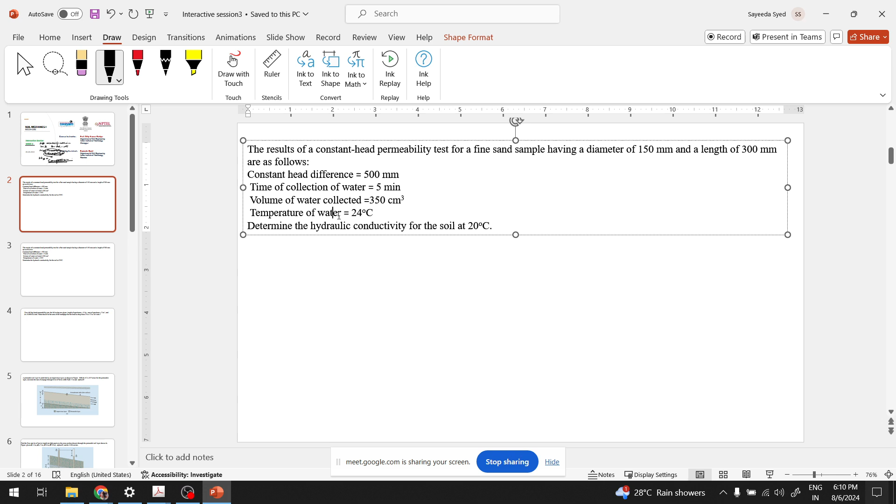First, we can do one thing. We can discuss what is it that we studied in permeability. So there are two concepts, permeability and seepage.

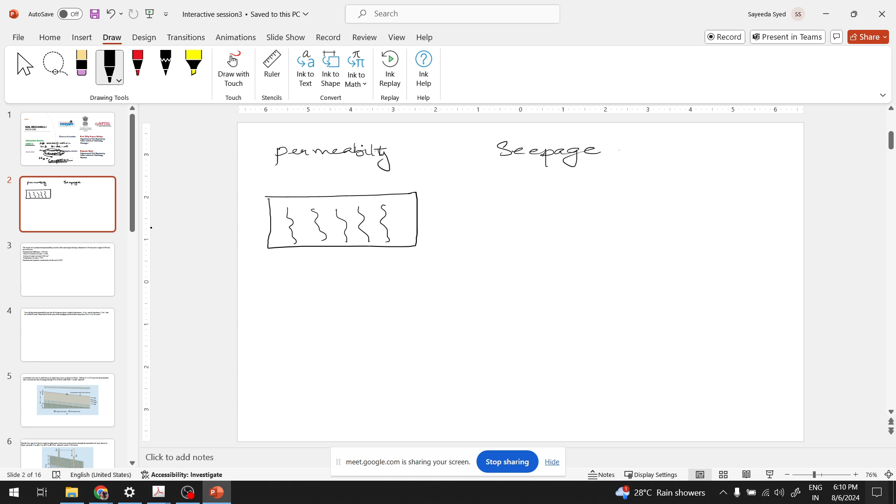So permeability just means that if you have a soil body, based on the pore structure of this soil body, what will be the rate of flow of water through this soil body. Coarse grained soils have higher diameter pores, so they are freely draining. The water does not encounter resistance in case of coarse grained soils, gravels, and sands.

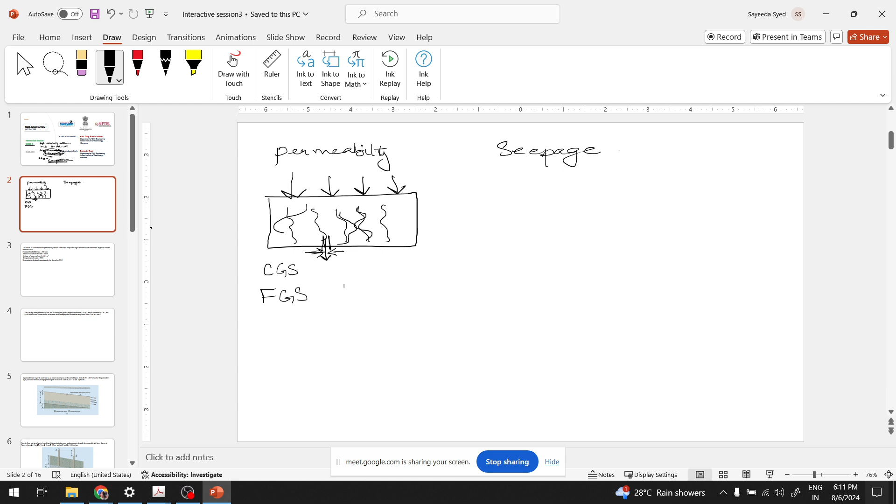However, in fine grained soils, the pores are so small, the diameter is so low that you encounter capillary forces. When your diameter is too low, the downward gravity force will be almost equal to, will be countered by the upward capillary force. See, if I take a thick tube and I have a column of water that wants to pass here, there is a force of adhesion, this surface tension, a force that will resist around this tube, and a force that is going downwards.

The force going downwards is the weight of this column. Now, when the diameter is too large, this weight is much, much greater than this resisting force. It's not even comparable. That is why we say that we have encountered negligible friction, negligible resistance to flow.

It's not negligible, there is resistance to flow based on the diameter, but the difference between coarse grained and fine grained soil is that when the diameter is low, the weight of this column reduces such that this is now comparable to these forces. That is why here we encounter more resistance.

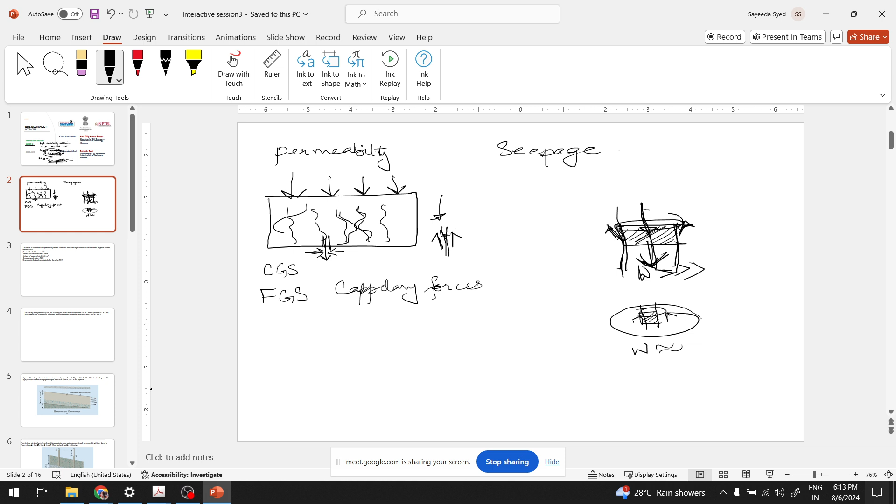So when we talk about soils, we firstly classify coarse grained and fine grained. Then, because they have totally different behavior, we talk about how fine grained soils behave with water and how coarse grained soils behave with water.

So in permeability, you have studied Darcy's law, which states that if you have a column of soil, this is basically kind of an energy conservation. We know that just like water flows from a higher level to a lower level, there is high potential here, low potential here, water will flow here.

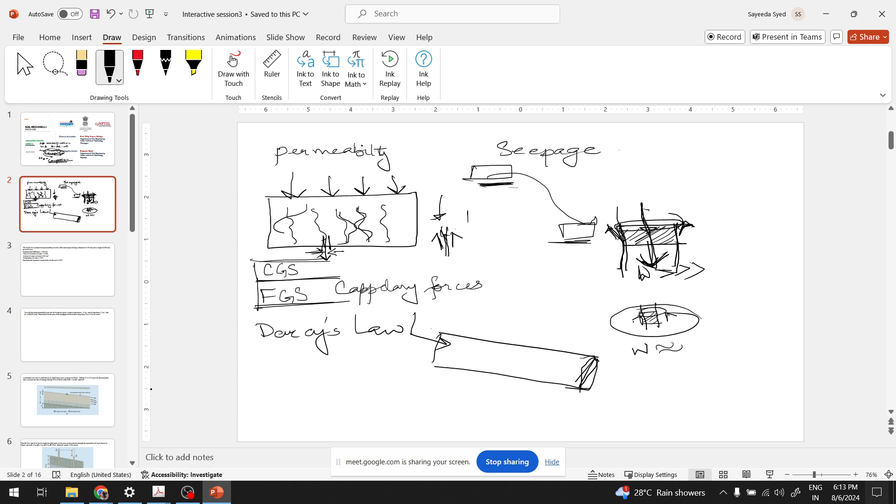Heat will flow from higher temperature to lower temperature, high potential to low potential. Same is the case with soil. Here, you have a gradient. So, high potential here, low potential here. If you have high head here, low head here, the water will flow in this direction.

So Darcy's law states that V is directly proportional to I, which means that the velocity with which this water will move is directly proportional to the hydraulic gradient. Greater the gradient, greater will be the flow of water, and this is a kind of fundamental property of soil.

Based on its structure and pore space, it will have a particular resistance to the flow that contributes to this proportionality constant, which is V equals K I. Now you have a hydraulic conductivity and you have an intrinsic permeability.

Intrinsic permeability is only due to the pore structure, while the hydraulic conductivity also accounts for the viscosity of the fluid flowing, the temperature at which the fluid is flowing, because these inherently affect the properties of the fluid which is flowing. For example, if instead of water, oil is flowing here, it will not move with the same speed as water. But when we talk only about soil structure, which is intrinsic permeability, then we say that it is a fundamental property because it's based only on the pore structure.

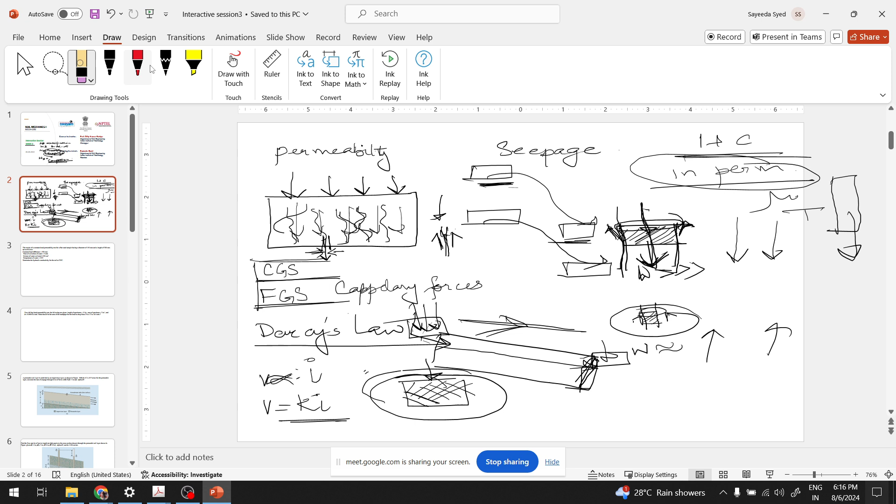So in permeability, we studied what permeability is. Then we studied how we calculate permeability. So there are some tests in lab.

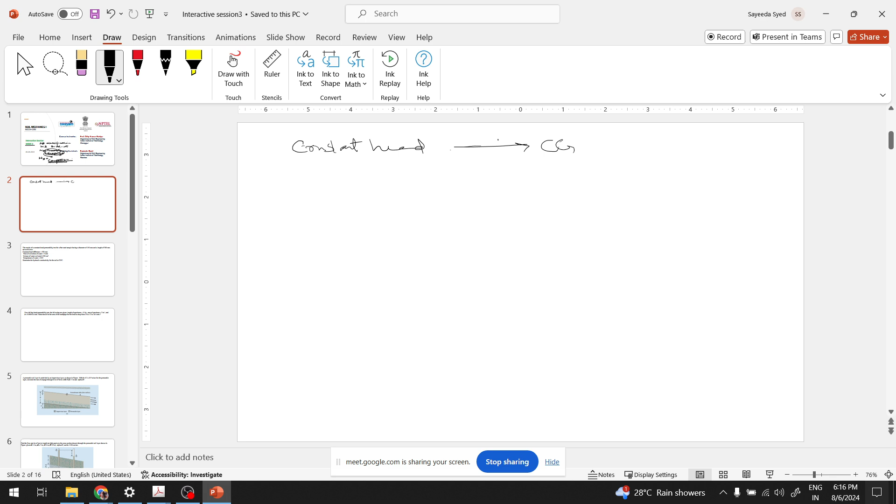Now, because coarse grain soils are freely draining, fine grain soils are not so freely draining. So we have different tests for different soils. We have a constant head permeability test in lab for coarse grain soils, and a falling head permeability test for fine grain soils.

I'm sure you studied this, so I will not go in detail. Then you have some field tests, how we conduct permeability in a field. Why is it necessary to conduct permeability in a field?

Just as I said, you are talking about pore structure. Now, if you take a sample from the ground, this is a disturbed sample, you collect only this part and it gets disturbed, somewhat squished or expanded. So will this reflect the actual permeability in the field? Also, because the soil is heterogeneous, the permeability reflected here will not be equal to the permeability elsewhere. That is why we conduct field tests in which we calculate the permeability in field without requiring the sample, because disturbance to the sample can give very different values for permeability.

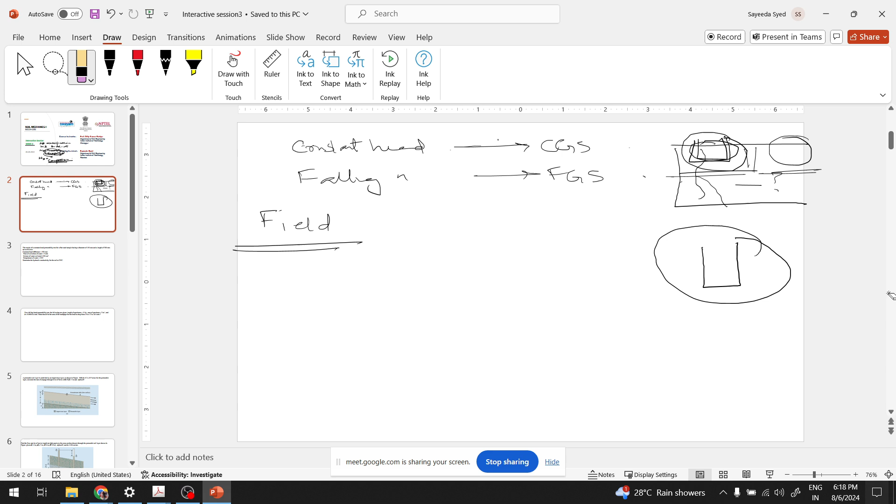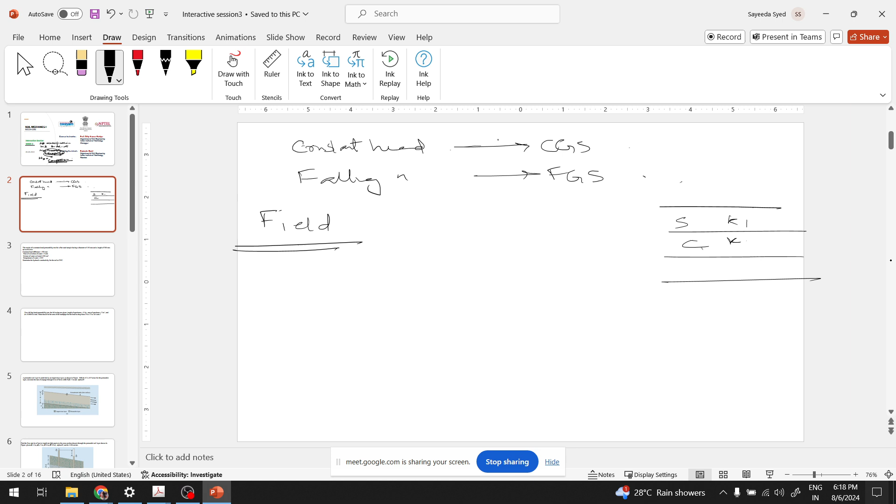Okay, that is that. Then we talk about stratified deposits. If you have sand, then clay, and then something else, how will the water behave in this scenario? If the water is flowing in this direction, or in this direction, how will this behave?

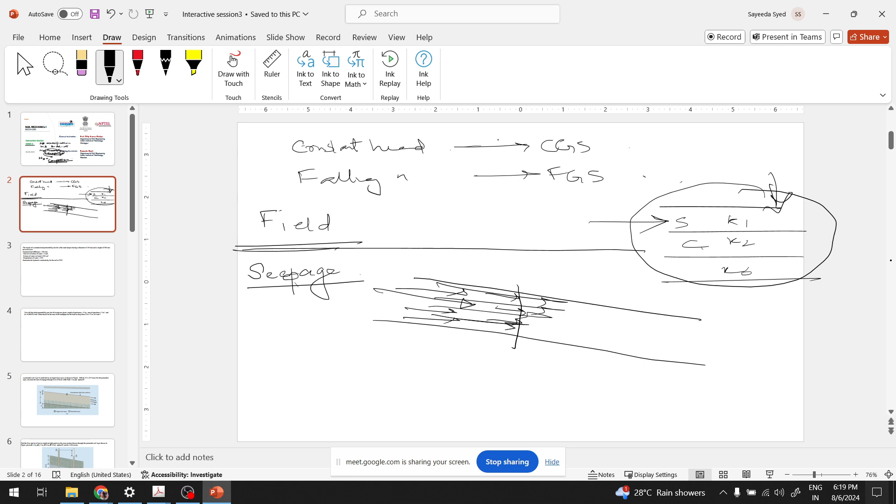So that was basically what you studied in permeability, and then you talk about seepage. Now, how is seepage different from permeability? Seepage is different because in seepage, water is flowing through the soil. In permeability, we are just trying to determine if the water will flow, and how easily it will pass. In seepage, the water is already flowing. Now we are trying to see how much force, for example, is generated by this flow of water. So that is what we study in seepage.

So let's move on and try to solve some questions. Do you have any question? Okay, okay. So let's move on to the first question.

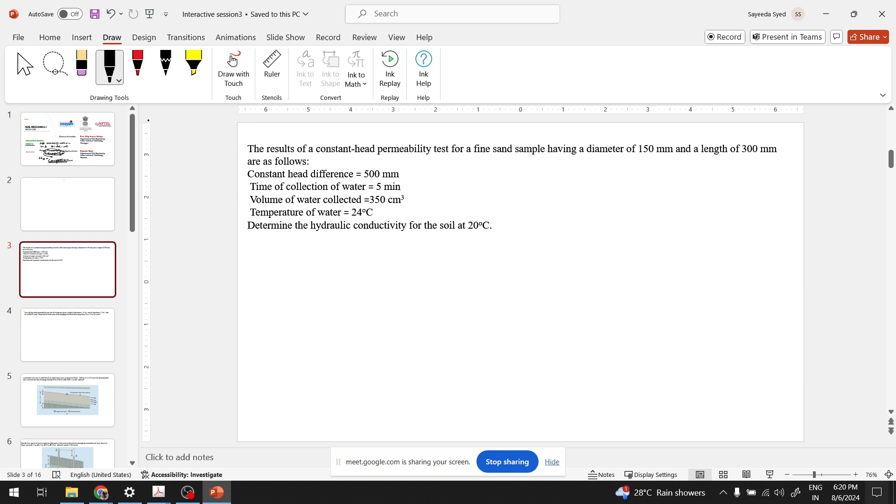Results of a constant head permeability test for a fine sand sample having a diameter of 150 mm. So, for what kind of soils do we perform a constant head permeability test? Not the samples—what kind of soil, fine grained or coarse grained? Why do we perform falling head for fine grained?

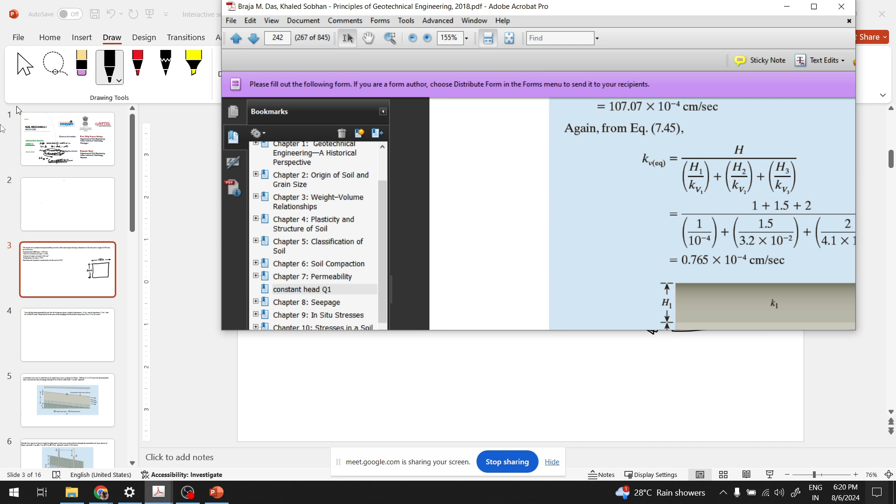See, what happens in lab is you have this mold, okay, and it's filled with soil. Then you take a standpipe. I'll show it here. In lab, you have this mold. You take a standpipe and you take a ruler here.

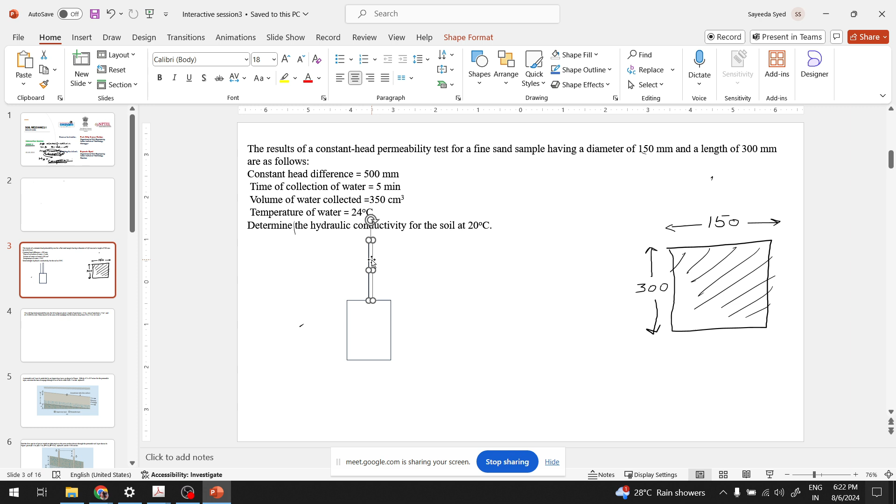There are two ways in which you can calculate. What we want to know is how much water. One second, sorry for my drawing. And we have a ruler here. What we can do is with this standpipe... let me actually make this easier. Okay, so we have a standpipe, we have a mold, and we have a ruler. Let's say that this is a ruler. Okay, so I pour some water in this pipe.

I pour some water in this pipe, and with time the water will flow. What I will do is, from this ruler, I will time from this height to this height, how much time did it take? So I know L1, I know T1, I know the area, so I know the volume. So for volume 1, T1 time was taken. I know how much water discharge is taking place here, isn't it?

Now, in fine grained soils, because the permeability is very low, this will take at least a minute to come from here to here. So I can calculate T1 as 5 seconds, 12 seconds, or something like that. But in coarse grained soils, the flow of water is so high that as soon as you put some water here, it will gush down. You will not get any time to record any T.

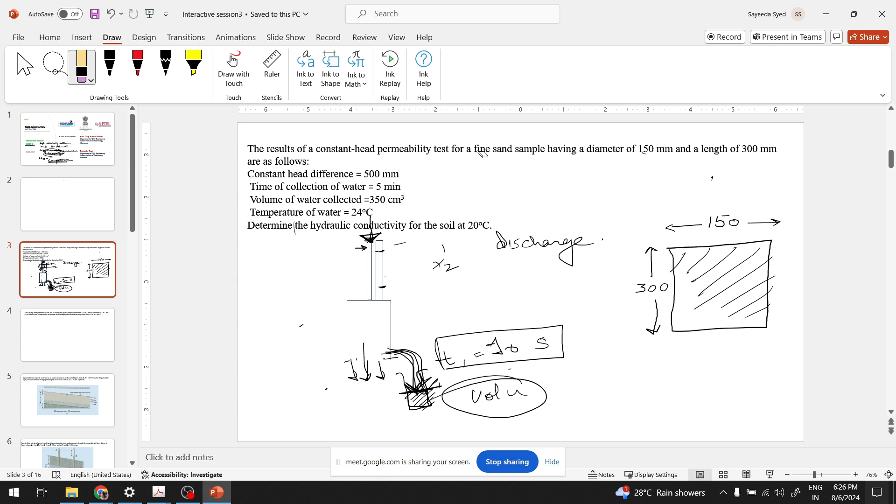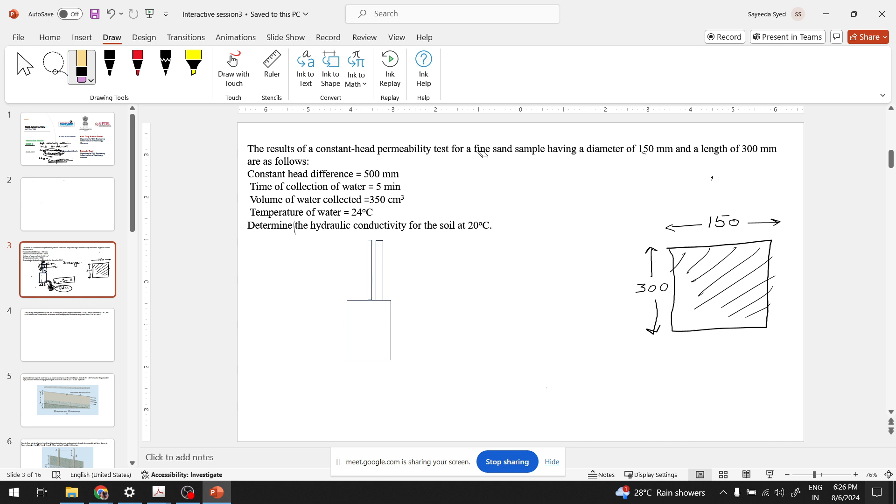Okay, so let's move on, let's try to solve this question. Do you have any question, Anand? Has anybody else joined the class?

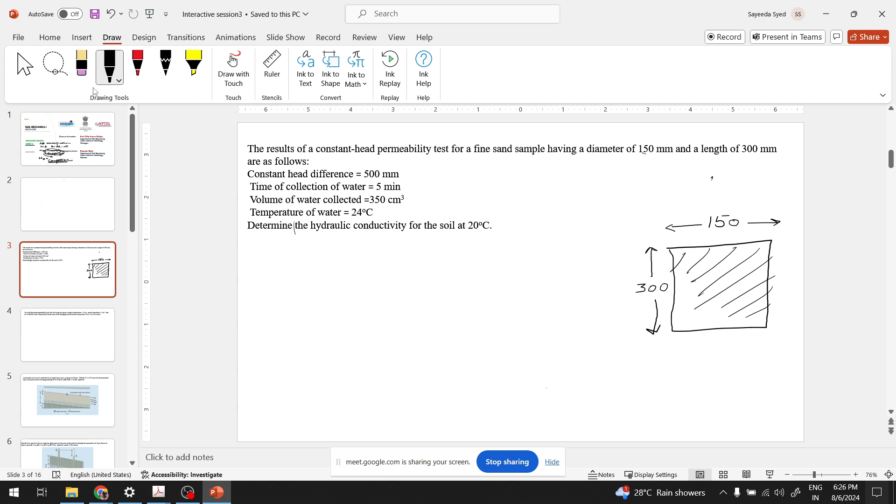The results of a constant head permeability test for a fine sand sample having a diameter of 150 mm and length of 300 mm are as follows. The constant head difference is 500 mm.

The time of collection of water. The constant head difference means, now see, as I said we are collecting water at the bottom. But as we pour, everything is going out, everything is going out. So first we need to establish a steady state, because Darcy's law is valid for steady state only.

So what we do is we take a container here, and we put water in this at, for example, Q1 discharge, through a pipe. Now the flow of water through this pipe should be such that the level of water in this overhead container should remain constant. And how will it remain constant? That Q1, the water we are putting in, if it is equal to Q2.

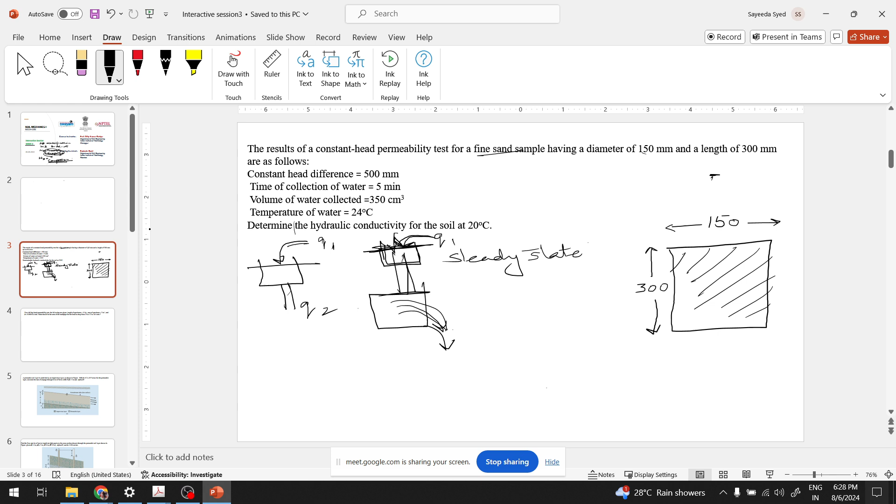If Q1 is equal to Q2, what will happen? The amount of water leaving is equal to amount of water entering. So this level will not change, this will remain constant. So we need to change the discharge of our incoming water such that we reach a state where this level remains constant.

Now, for example, I have an overhead container here at height h. We have established a constant head, which means I am pouring in water from here such that this level is not changing, and then water is going into the soil, and then it is coming out of the soil, and this is the head it is talking about, the constant head.

Constant head difference is 500 mm. Time of collection of water is 5 minutes. So the measuring flask I took here, I collected water in it for 5 minutes. Volume of water collected is 350 centimeter cube.

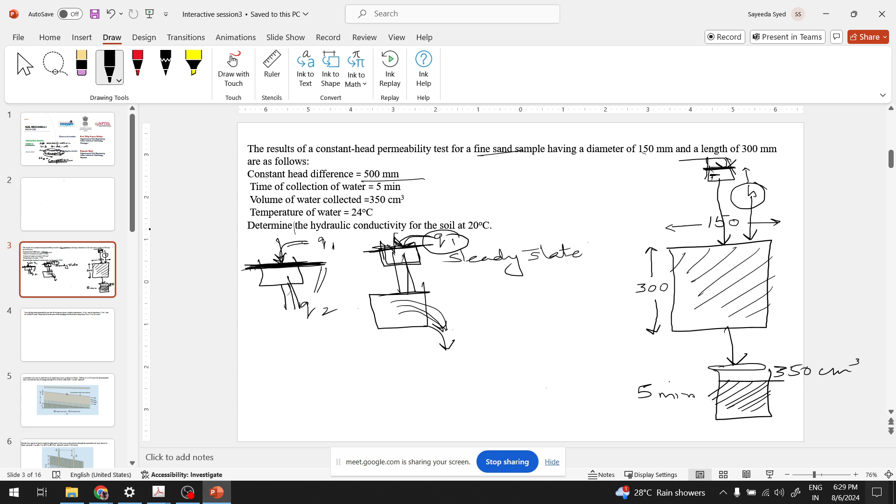And the temperature of water is 24 degrees Celsius. And now we have to determine the hydraulic conductivity of the soil at 20 degrees Celsius. First, let us talk about the permeability. Did you understand the question? Can you solve this question? Can you try?

We know that V is equivalent to K I, isn't it? And velocity we can write as discharge by time... velocity is discharge by area. And discharge is basically volume by time. So volume by area into time is our velocity. You study this in fluid mechanics.

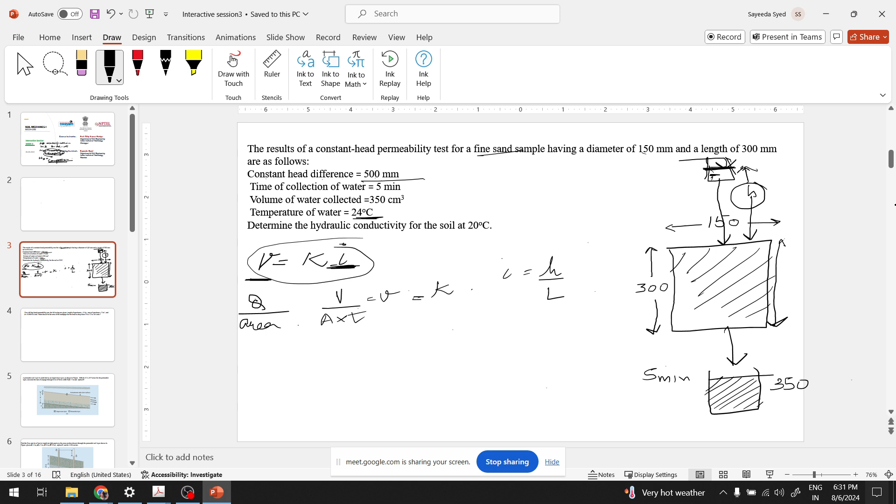Now you have K and I. You know what is hydraulic gradient? It is the head available per unit length which the water has to travel. I is equivalent to H by L. So if I put it here, I will have V by A into T equals K into H over L.

And K will be equivalent to V L by A H T. So we know the volume that was collected. So our permeability will be, the volume collected was 350 centimeter cube. The length of the sample is 300 mm, which means 30 centimeter.

Divided by the area of flow, this is 150 mm diameter, pi by 4 into 15 square, and then we have T is 5 minutes, so we can write 5 into 60 seconds, and we have H given as 500 mm, which is 50 centimeter. Okay, let's calculate this quantity.

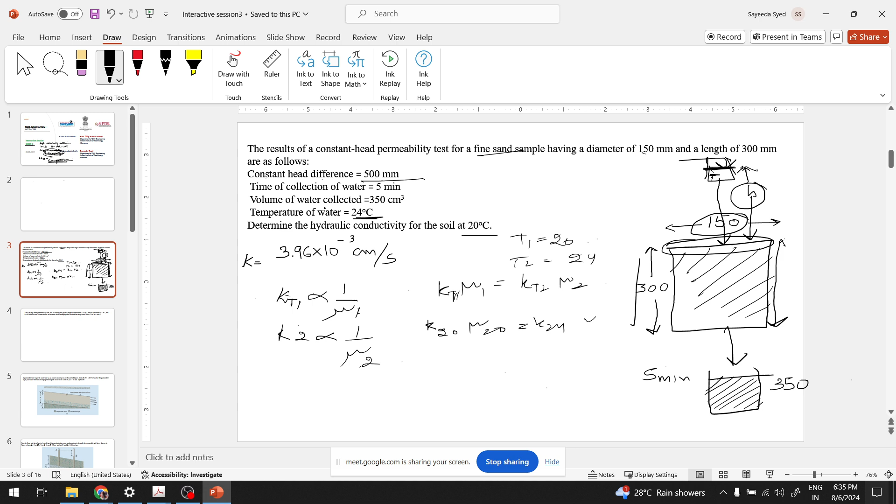So we can write that K at T1 times mu1 equals K at T2 times mu2, and we know T1 is 20 and T2 is 24. So K20 mu20 equals K24 mu24, and we want K20 equals K24 into mu24 over mu20, which requires the viscosity of water at 24 degrees Celsius and at 20 degrees Celsius.

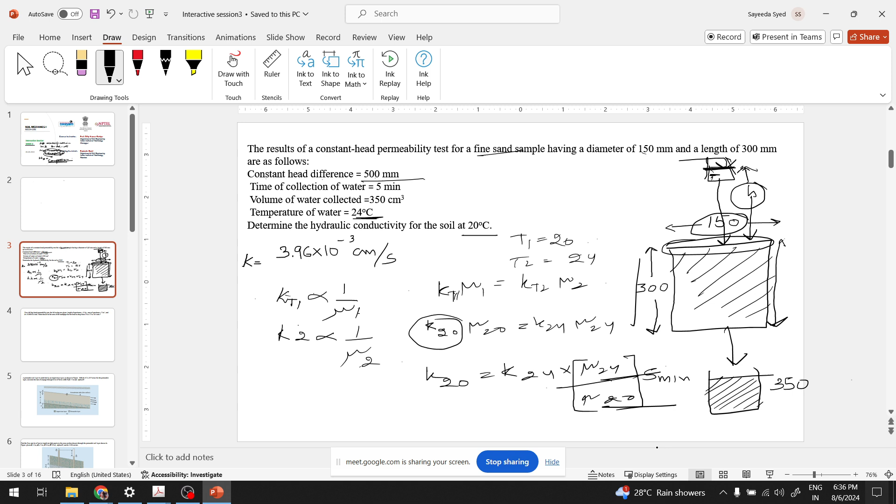So we can check this from a table. The purpose of introducing this was just to make you understand how permeability changes with temperature. So I will give you the value of this quantity. It is equivalent to 0.91.

So you can write that K at 20 is 0.91 times K at 24, which is 0.91 times 3.96 into 10 to the power minus 3 centimeter per second, which will be equal to 3.6 into 10 to the power minus 3 centimeter per second.

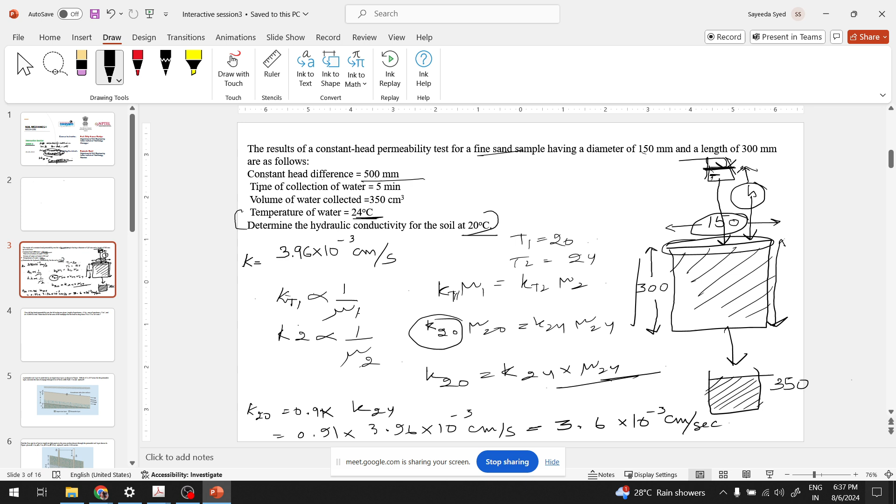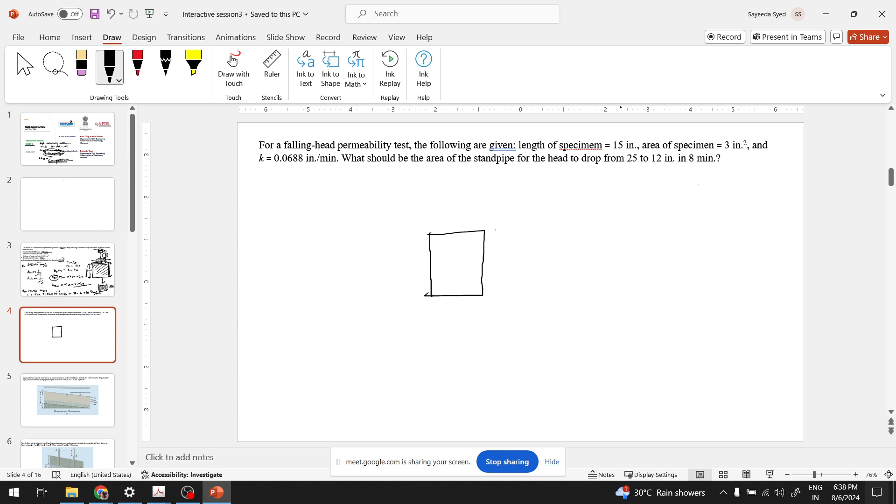Let's draw it like this. Length is 15 inch, area is 3 inch square, and the permeability given is 0.0688 inch per minute. What should be the area of the standpipe?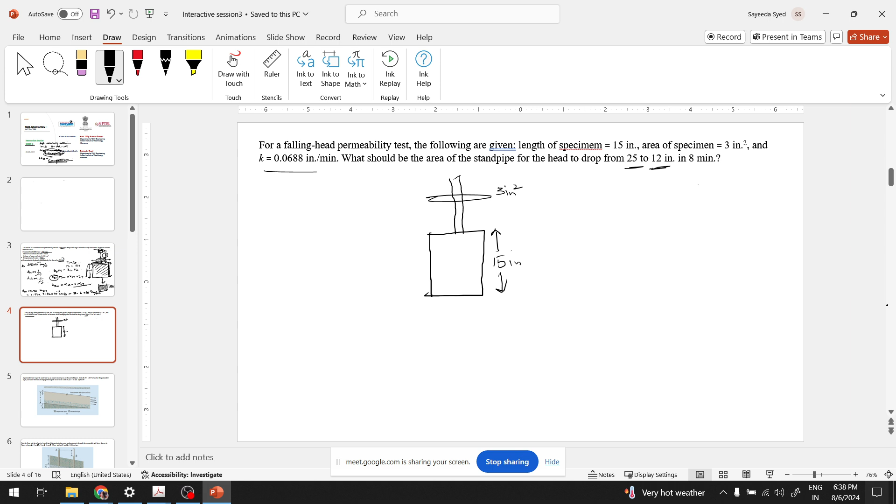As I said, in falling head permeability test we take a standpipe. What should be the area of the standpipe for the head to drop from 25 to 12 inch? And I also said that we have a ruler there. So the head is dropping from 25 to 12 inch, which means the length of fall is 25 minus 12, which is 13 inch.

And the time in which this fall takes place is 8 minutes. So I have to calculate the area of this standpipe. Basically, what am I doing? I'm calculating the volume of water that is flowing through this. I know the length, I know the time. So how will I calculate the volume? We'll multiply the length by area, isn't it?

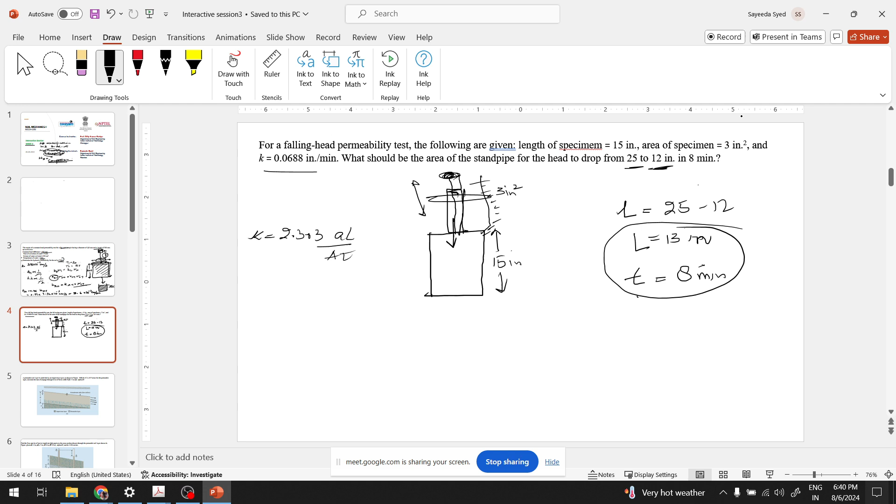You know, in falling head permeability test, you derive this formula: K equals 2.303 AL by capital A times t, log to the base 10 of H1 over H2, isn't it? So, Anand, can you calculate this for me? You have AL over capital A times t, log to the base 10 of H1 over H2. Okay, can you calculate this for me?

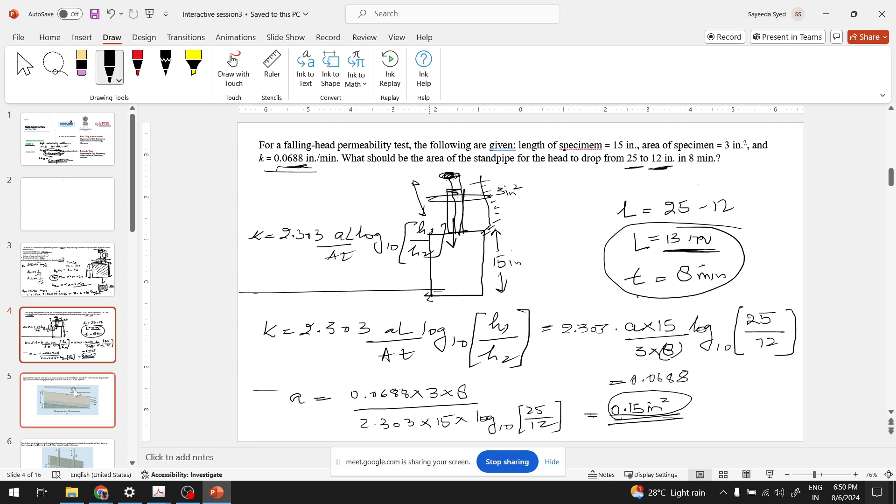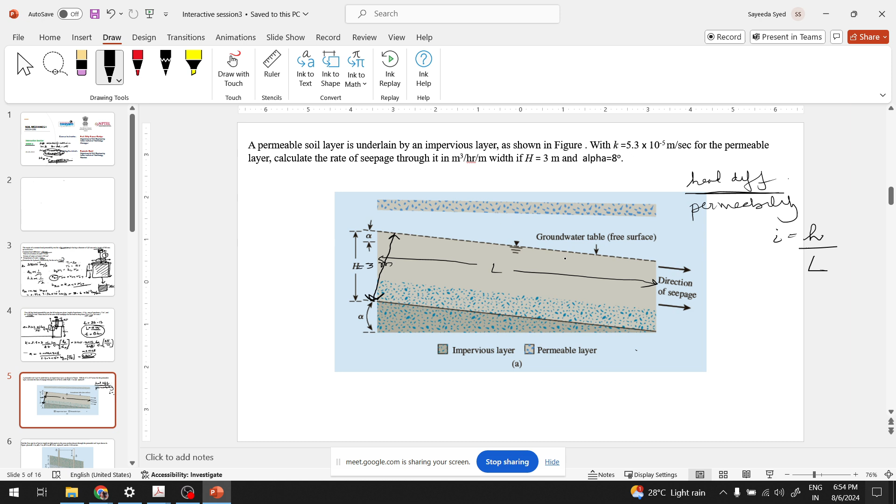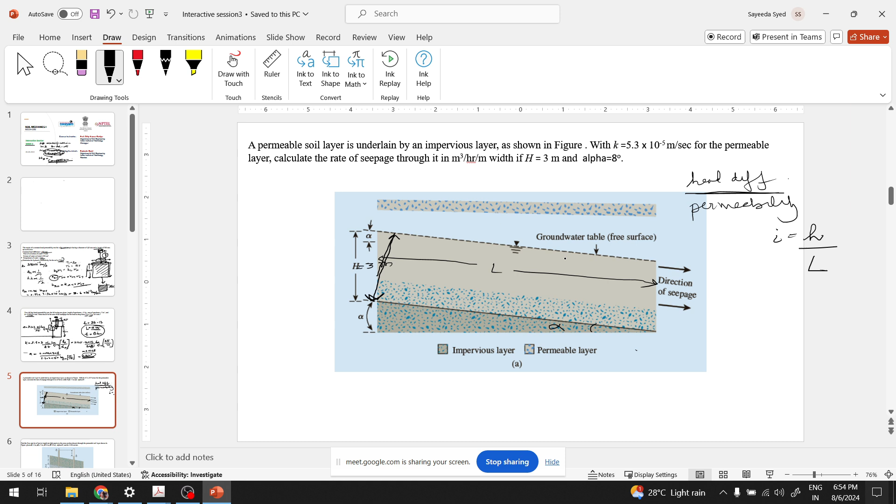So since this is alpha, how much will this be? I have a triangle. This is 90, this is 90 minus alpha, and this is 180 minus 90 minus alpha. So this angle here is 90 plus alpha. And if I drop a perpendicular here, this will be 90 and this will be alpha.

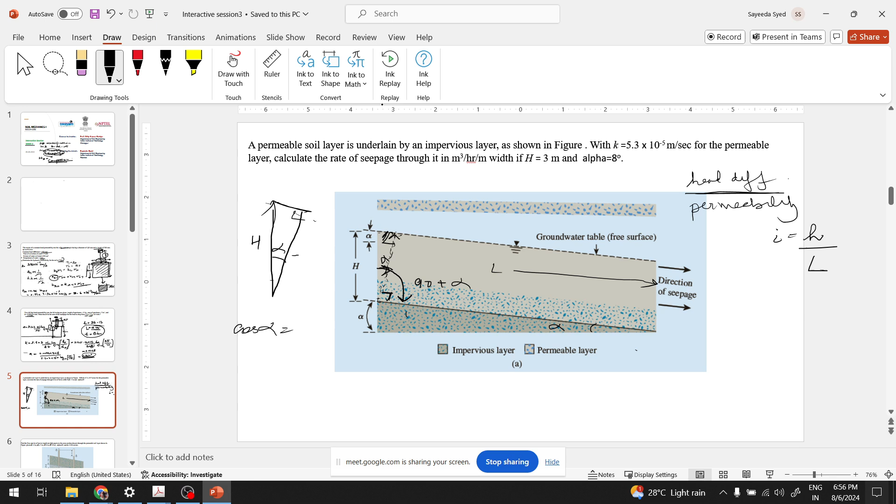Okay, so this is alpha. Let me actually draw a line because this is getting very shabby and I'm not able to. So this becomes alpha and this becomes H cos alpha.

Now what will be this distance? If we take this triangle, again we will say if this is the length L and say this is S, cos alpha equals S by L, so L will be S by cos alpha. So our length is S by cos alpha.

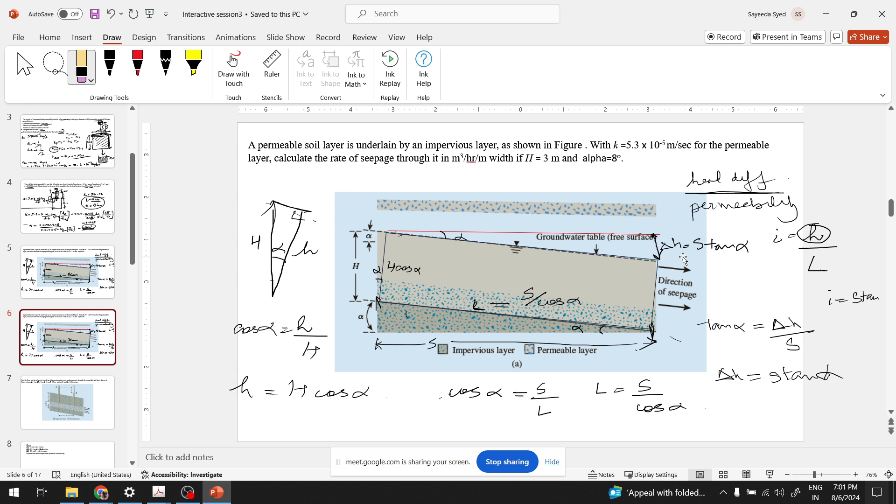So we know the head difference now, we know this delta H. Hydraulic gradient is S tan alpha over L, which is S over cos alpha. Let me rub off the unnecessary parts. Now the hydraulic gradient is delta H by L, which is S tan alpha over S over cos alpha. So our delta H by L will be equivalent to tan alpha cos alpha. We can write this as sin alpha over cos alpha into cos alpha, equal to sin alpha. This is our I. So I equals sin alpha.

Now we need to calculate the seepage. How much is seepage? Seepage is basically the volume of flow through a soil. Q equals K I A. We know the K is 5.3 into 10 to the power minus 5. We know the I is sin alpha.

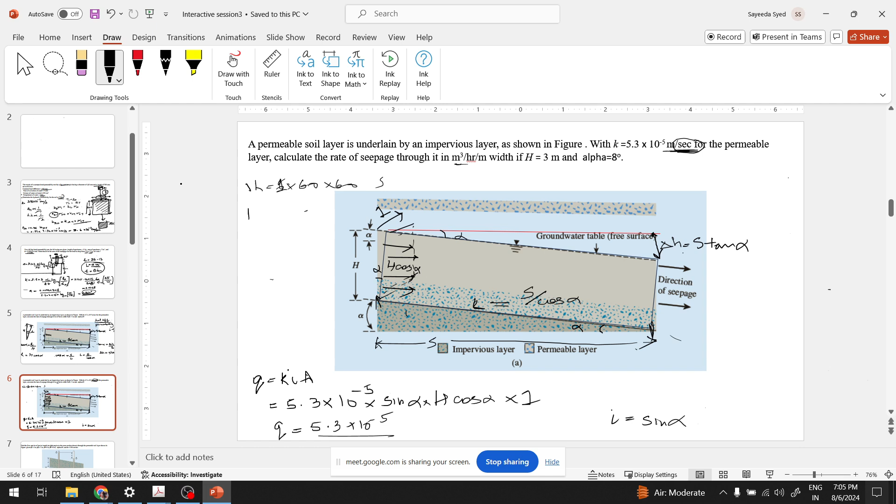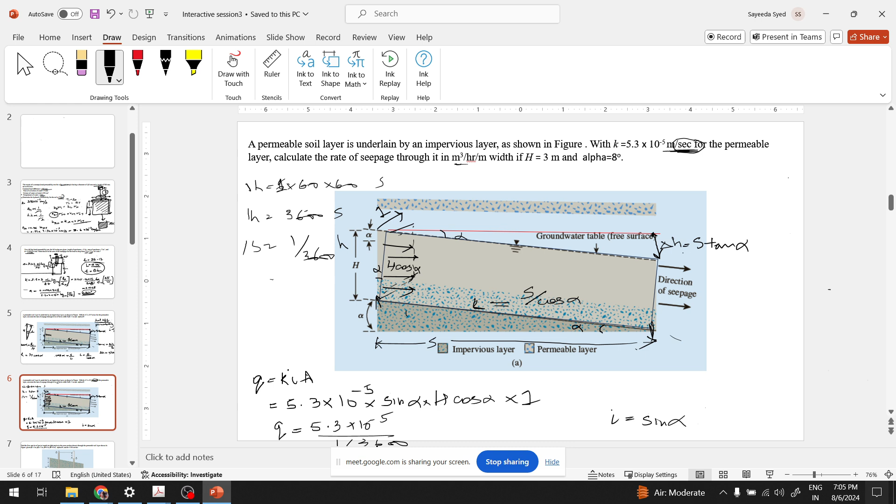So our Q will be equal to - let's calculate. This will be 5.3 into 10 to the power minus 5. We have to calculate in meter cube, everything is in meter, that is fine, but here we have been given in seconds. Let's change this to hour. 1 hour is equivalent to 1 into 60 into 60 seconds, which is 3600 seconds. So 1 second is equivalent to 1 by 3600 hours. So I divide 1 by 3600 into sine 8 into H is 3 into cos 8. Okay, so let's calculate.

So this comes out to be 0.0789 meter cube per hour per meter. Per meter means 1 meter in this direction. If we had been given a column of width x meters, we would simply take the area as H cos alpha into x. But right now, because we have taken 1 meter in this direction, that is why we are adding this per meter. Any question?

Any question? Okay, so let's move on to the next question.

So what have we been given here? Find the flow rate, seepage or flow rate in meter cube per second per meter, which means 1 meter in this direction, at right angles to the cross section shown through the permeable soil layer shown in figure, given H is 8 meters, H1 is 3 meters, small h is 4 meters, S is 50 meters, alpha is 8 degrees, K is this much. So we need to find the Q.

So here, if you see, these are impervious. The only pervious layer is the middle one. And since this is the direction of flow, we have to take from here to here only. We will take a perpendicular here, we will take a perpendicular here.

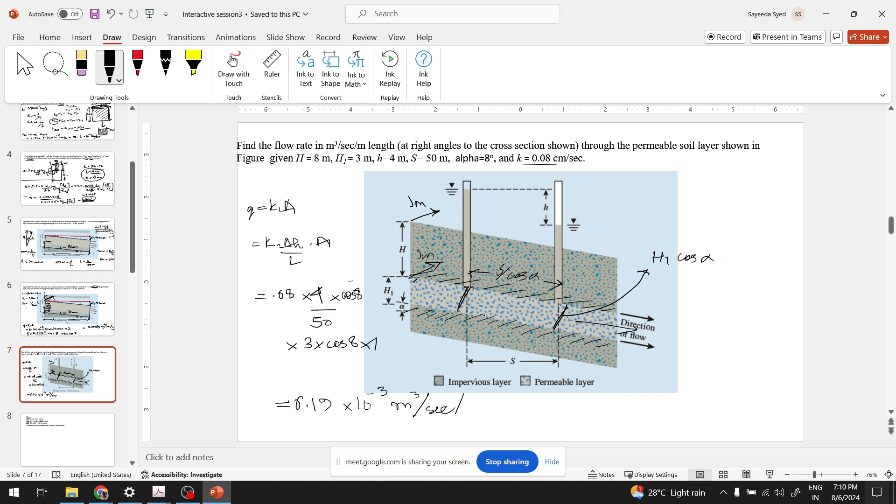So this comes out to be 0.19 into 10 to the power minus 3 meter cube per second per meter. This will be our rate of flow.

Any question? Okay, so let's move on to our next question. So we did a question on falling head, we did a question on constant head, we did a question on seepage rate. Now let us do a question on permeability of stratified soils.

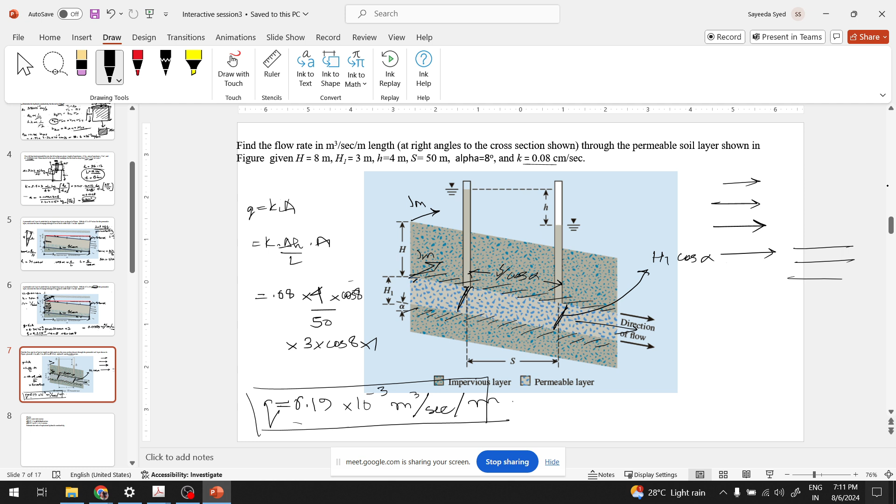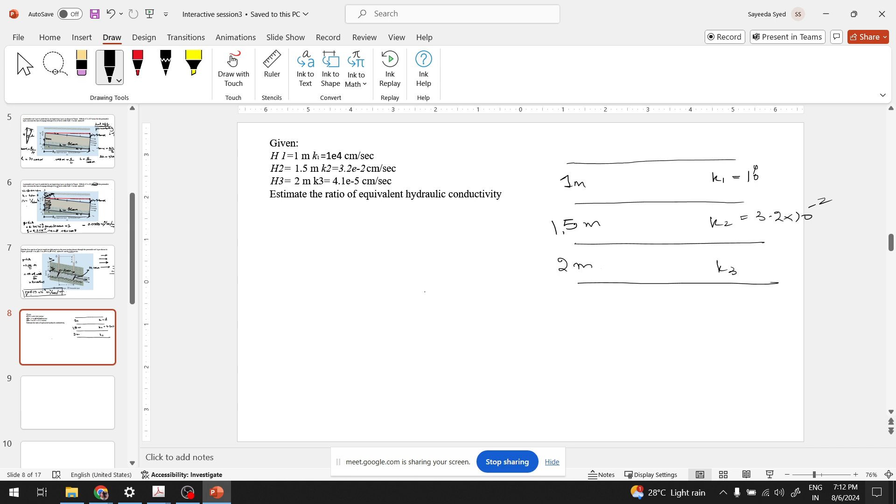So we have been given a stratified soil deposit in which H1 is 1 meter, this is 5 meter, 1.5 meter. There is a correction here. This is 1.5 meter, this is 2 meter, and then K1 is 10 to power 4, K2 is 3.2 into 10 to power minus 2, and K3 is 4.1 into 10 to power minus 5 centimeter per second, centimeter per second, centimeter per second.

Estimate the ratio of equivalent hydraulic conductivity. So when the water is flowing in this direction, it will flow with a fast rate here because conductivity is high, then slower, then slower. So equivalent hydraulic conductivity, as if it was only one deposit, not a stratified deposit, that will be the equivalent hydraulic conductivity. So let's calculate that.

Excuse me for a moment.

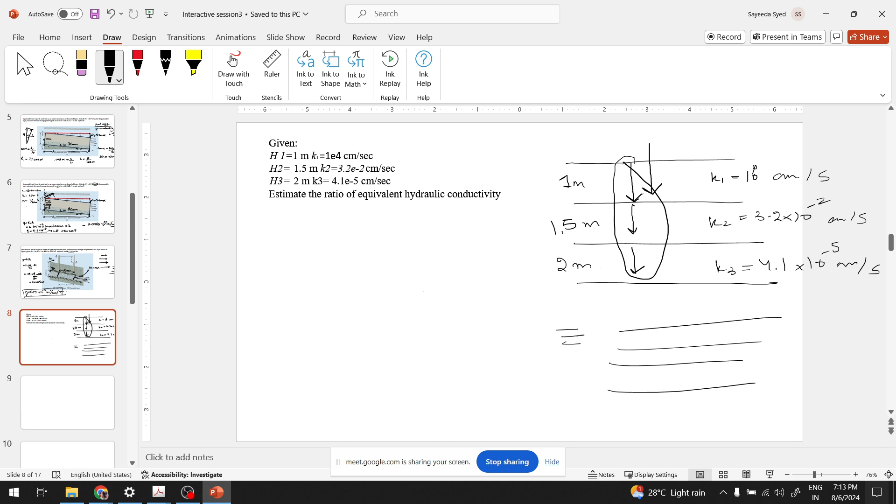So if we talk about equivalent hydraulic conductivity, what will be the velocity of flow in this? Velocity is equivalent to Ki, isn't it? See, if you see here, each have different delta H, they have different delta L, so the hydraulic gradient is not equal. But we say Q is equal to KIA, A is same for all. So Q1 is equal to K1 I1 A1, Q2 is equal to K2 I2 A, Q3 equals K3 I3 A.

Okay, so equivalent will be kind of an average. The flow, for example, this is L1, sorry, H1, H2, H3. Our equivalent conductivity will be, the water is flowing with the conductivity of K H1 through H1 plus K H2 through H2 plus K H3 through H3, divided by the total length that the water is traveling through. This will be our equivalent hydraulic conductivity.

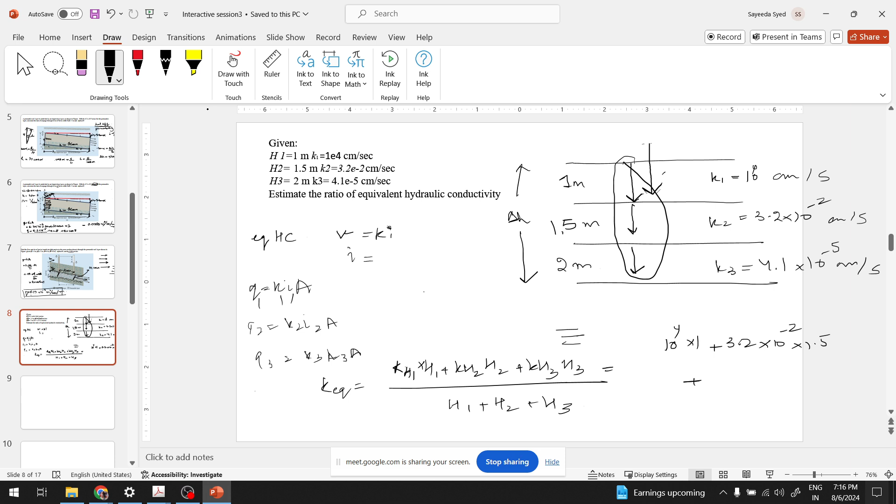So this will be 10 to power 4 into 1 plus 3.2 into 10 to power minus 2 into 1.5 plus 4.1 into 10 to the power minus 5 into 2, over 1 plus 1.5 plus 2. So let's calculate this. This comes out to be 107.07 into 10 to power minus 4 centimeter per second.

But I made a mistake here. This was in the horizontal direction. We are multiplying, this is for the horizontal K equivalent. So the water is flowing through K1 in an area of 1 meter into 1 meter, then through K2 with an area of 1.5 meter into 1 meter, then K3 with an area of 1 meter into 2 meter. And then the average height of flow is like we average it by the total height of flow. So this is the K equivalent in the horizontal direction.

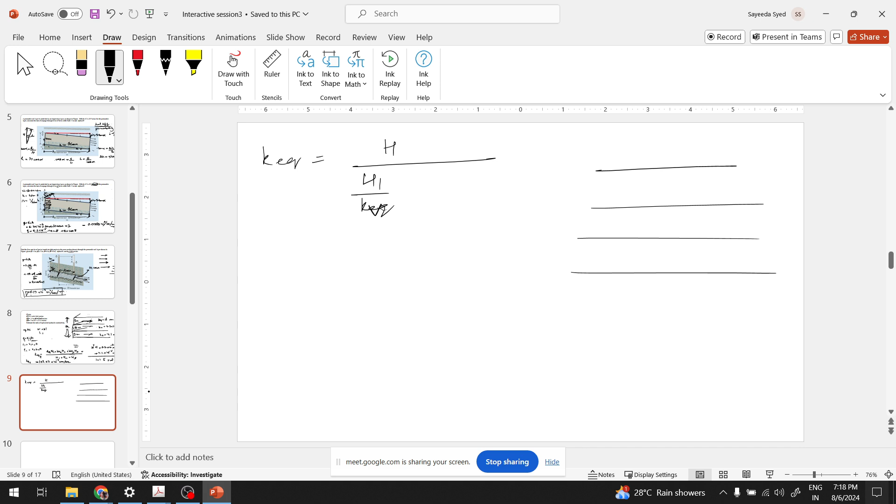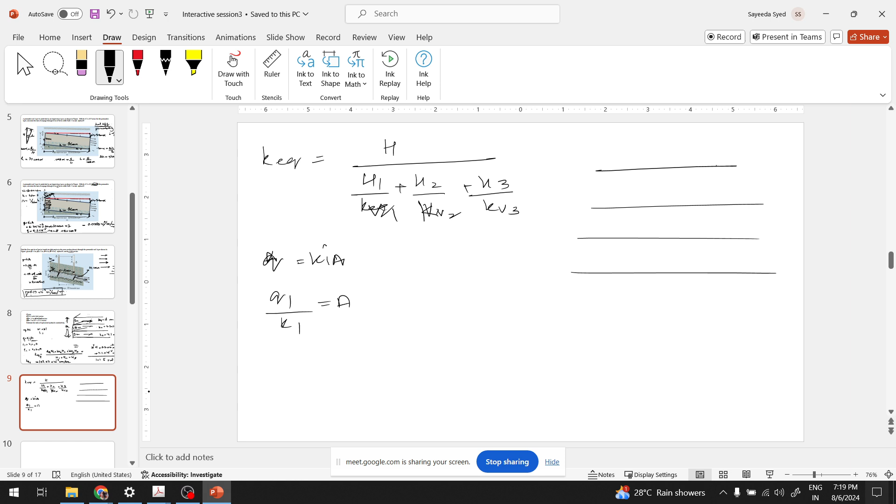Now if you talk about K equivalent in the vertical direction, that will be different. For that, we will take H1 by K equivalent KV1 plus H2 by KV2 plus H3 by KV3. Okay, because here your area is same, but your Q is equivalent to KIA. Area is same, so Q1 by K1 equals A, Q2 by K2 equals A, and from there we take an average.

This will be 1 plus 1.5 plus 2 over 1 over 10 to power minus 4, plus 1.5 over 3.2 into 10 to power minus 2, plus 2 over 4.1 into 10 to power minus 5. The mistake is that this is minus 4.

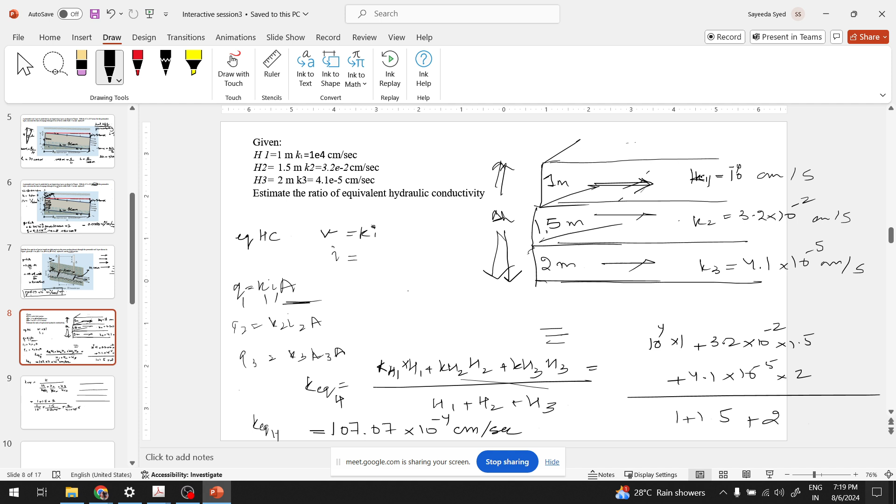And K equivalent in the vertical direction comes out to be 0.765 into 10 to power minus 4 centimeter per second, and this is K equivalent in the horizontal direction.

Then we calculate the total equivalent hydraulic conductivity as K equivalent in horizontal over K equivalent in vertical, which is 107.07 into 10 to power minus 4 over 0.765 into 10 to power minus 4. This comes out to be about 140, the equivalent hydraulic conductivity K.

So this is what we utilize in our flow net when we have anisotropic soils that have different hydraulic conductivity in a vertical direction and different hydraulic conductivity in a horizontal direction. Then we take this.

So we have been given this diagram of a confined aquifer, and the question says that a pumping test from a confined aquifer yielded the following results.

You see what we are doing here: this is the piezometric level before pumping, and then we are pumping out water from this well, and then we are checking how the level in these wells will decrease. This is the well we are pumping out from, not this one.

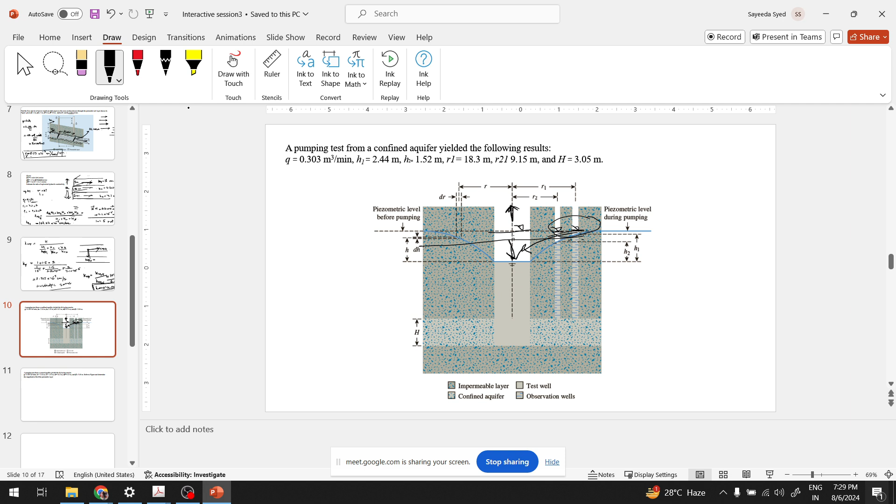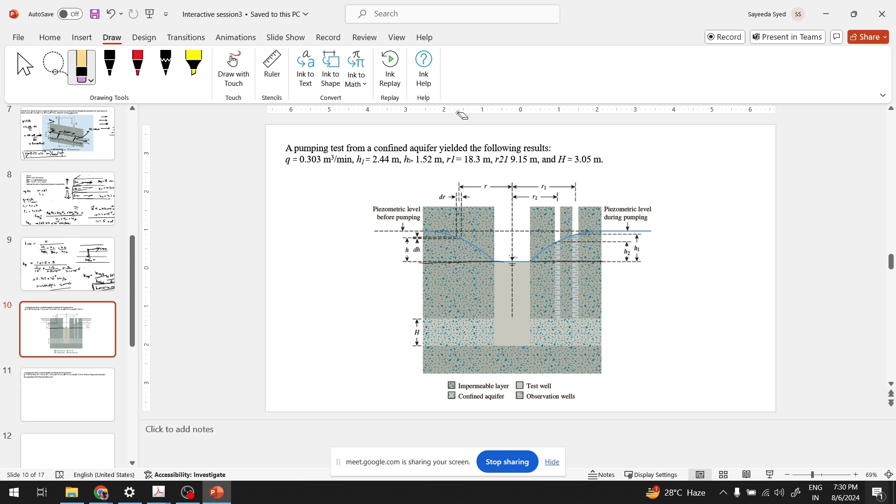Initially, all these wells had this water level. Now we are pumping out from here, not from here. But a head difference will be generated between these three wells. The water will have a tendency to flow into this well such that a new equilibrium state is developed, and all the wells are at the same level. So at t equals infinity, we will have this as the final level. But as soon as we stop pumping, the head will increase again because that was the original equilibrium. Right now we are disturbing the equilibrium by providing a force of pumping.

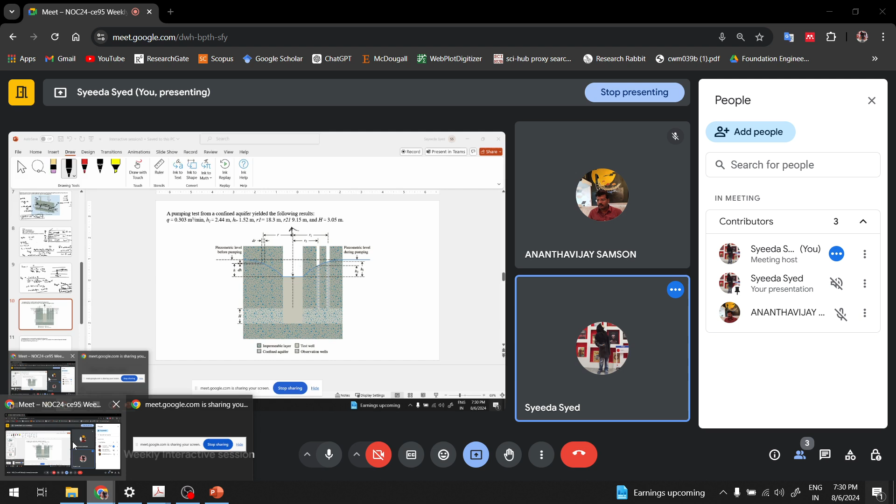Excuse me, just a moment. Amar. Okay, so now.

Q is the rate at which we are pumping water out from this well. H1, H2 is given here, and this radial distance is given to this well and to this well. So, during pumping at a constant rate, the head at this well is H1, at this well is H2. So what do we have to calculate?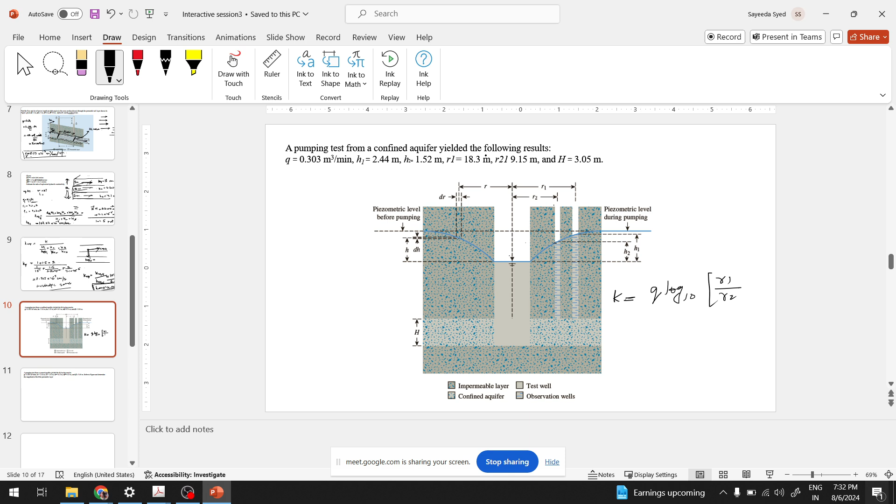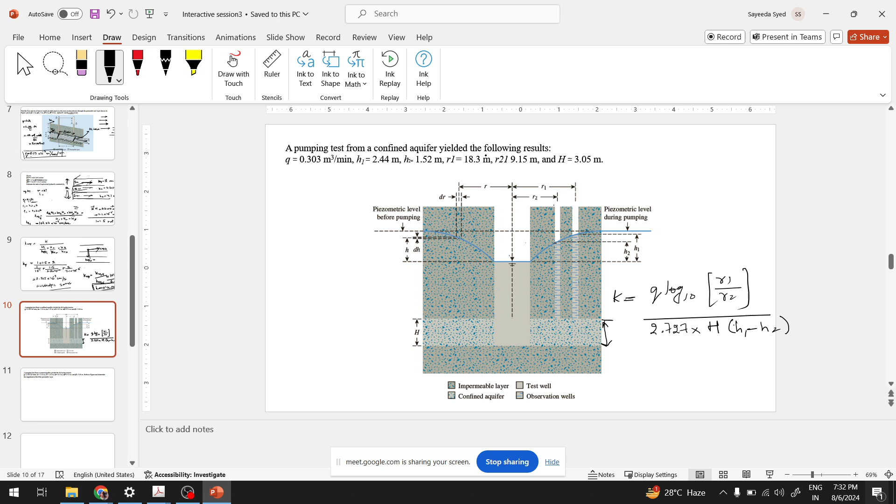We have to calculate the permeability of the layer. You simply have this formula for your pumping test that you might have derived in class lectures, where you get K equals Q log to the base 10 of R1 over R2, over 2.727 times H, which is the thickness of the aquifer, into H1 minus H2, which is the head at these two wells.

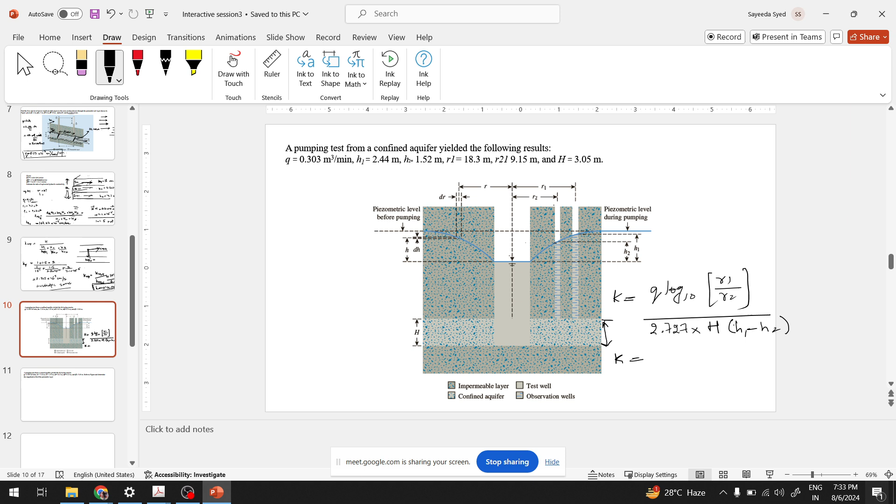So let's calculate: K equals 0.303 log to the base 10 of R1 is 18.3, R2 is 9.15, over 2.727 into H is 3.05, into H1 is 2.44, H2 is 1.52. This comes out to be...

2. Sorry, my laptop got turned off. So, okay, let's continue. I need to share my screen. Okay, yeah.

So K comes out to be 0.01192 meter per minute, which is approximately 0.0199 centimeter per second.

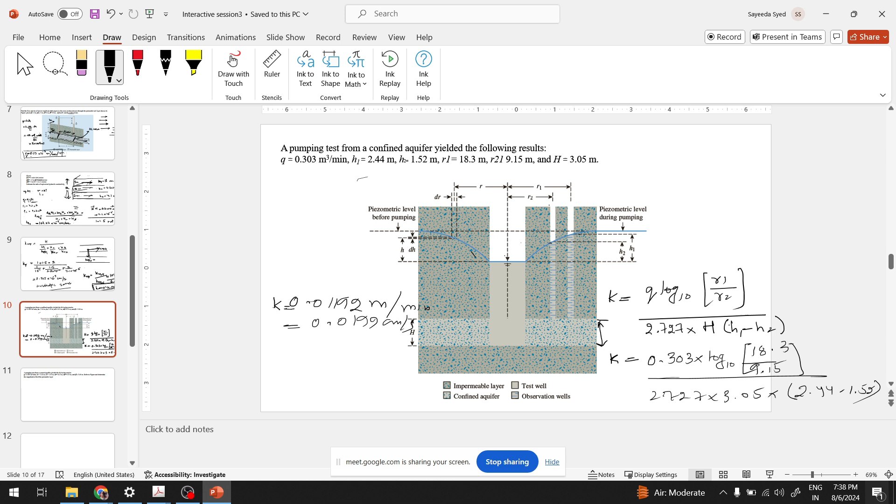So that's one question on confined aquifers. Let me check. Okay, this is the same question.